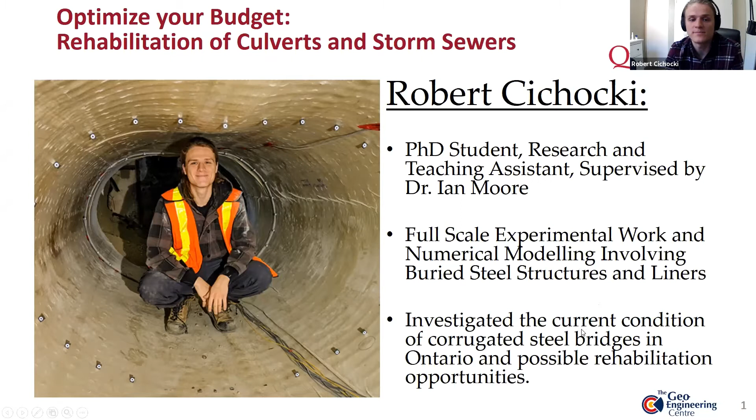What I found is that there's a lot to untangle from a lot of different resources. During my research, I reviewed resources from the MTOs, other departments of transportation, the Federal Highway Administration Program, National Cooperative Highway Research Program, different conference papers, journal articles, manufacturers' brochures, as well as other documents. For my investigation into these resources, I built a 3-part report that looked at what is the current condition of these structures, why are they in this condition, and what can we do about it?

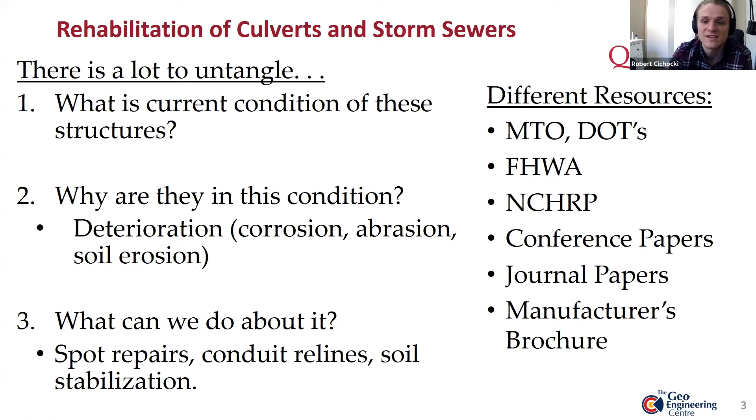So in this presentation, I'm going to briefly discuss the current condition of corrugated steel structures in Ontario, and the commonly experienced deterioration mechanisms such as corrosion, abrasion, and soil erosion, and what we can do about it. Some spot repair methods, as well as conduit relines and soil stabilization, which for most of these things are actually also discussed in the research paper that we published on this topic.

Okay, taking a look at the condition of these structures. Every bridge structure in Ontario that's managed by the MTO has to be inspected on a biennial basis. Each bridge is inspected following primarily visual element by element inspection. Out of all the bridges that the MTO oversees, there's about 280 of them that are made from corrugated steel materials. For corrugated steel structures, the condition of the steel conduit is judged by the amount of corrosion, local and global deformation, as well as bolt cracking.

So again, we're looking at a rating scale that goes from excellent condition, where there's no observed material defects, good condition, fair condition, and poor condition, where we're evaluating how much global and local deformation the corrugated steel pipe has, as well as how severe the bolt cracks are and how severe the corrosion is. A condition rating is then assigned to the element based on what's found.

Based on the condition of the elements at the time of inspection, the structure is given some sort of remaining value. That remaining value of the structure is compared to what the original value of the structure would have been if it was in excellent condition. Then we multiply that proportion by 100 to get our bridge condition index.

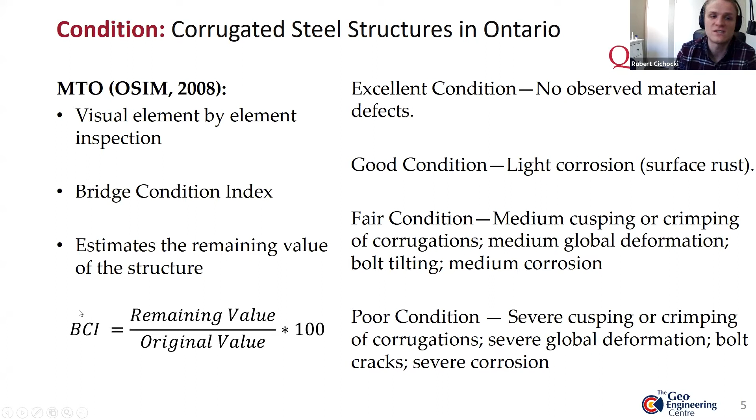Generally, the bridge condition index is used to prioritize the rehabilitation of bridge structures. For bridge structures that score over 70, there's no rehabilitation plan, and you can see that there's a majority proportion of bridges in this area. Between 60 to 70, rehabilitation should be undertaken within the next 5 years. And under 60, there should be some sort of immediate rehabilitation plan.

So what we're looking at in this chart is cumulative population distribution curves, and each curve represents a different type of bridge material. For each bridge material, that curve shows what proportion of that bridge's material has at most a certain BCI value. We're looking at the bridge condition index on the x-axis and the proportion of bridges on the vertical axis. Taking a look at the dark red line, which represents corrugated steel, we can compare the condition of corrugated steel to other bridge populations.

Looking at corrugated steel structures, we see that it has the highest proportion of bridges that are going to require some sort of immediate attention, as well as the highest proportion of bridges that's going to require rehabilitation within the next 5 years. So this had me wondering, why is that really the case? Why do we see so many corrugated steel structures that have these high proportions of structures that are going to need some sort of rehabilitation?

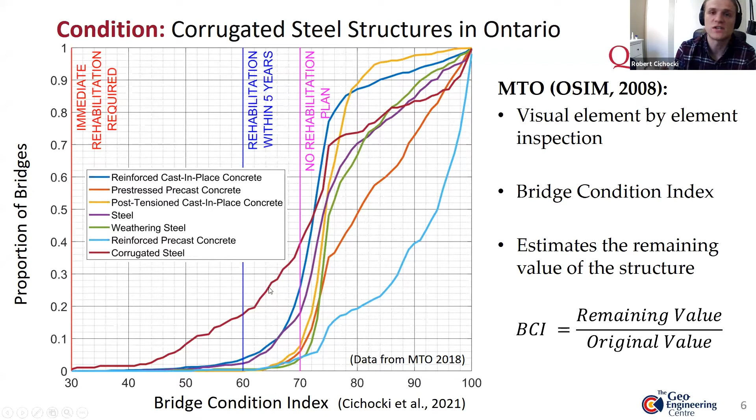The next thing I found when looking at the statistics from the MTO was that corrugated steel structures are one of the least rehabilitated structures they manage. Here we look at the proportion of bridges that were rehabilitated across the age of the bridge, with the bottom axis showing the year bridges were built and the proportion rehabilitated for that age group. For corrugated steel, almost across all ages these structures have the smallest population of rehabilitated structures. Cumulatively, only 37% of corrugated steel structures have been rehabilitated, while 48 to 88% of other bridge structures have had some rehabilitation performed.

Which brings up the next thing I found: historically there haven't been many comprehensive resources providing guidance on how to rehabilitate these structures and what the performance of these rehabilitations is, which explains why we find ourselves in the position we are today. Although as of 2019, the MTO has published their own trenchless design guideline on their webpage, which also provides information on many of the technologies I'll be discussing today.

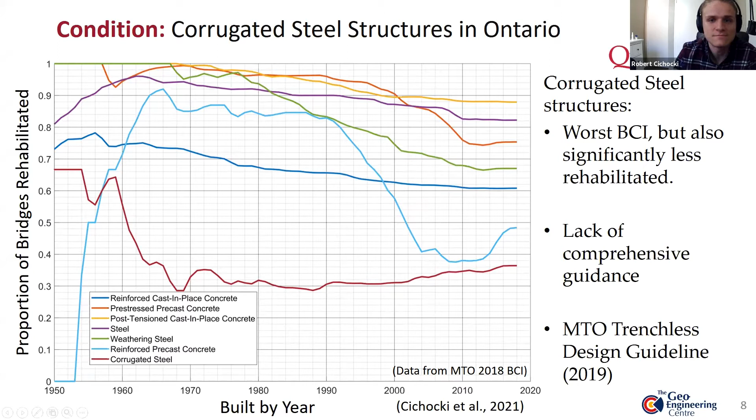So all structures deteriorate over time, and it's good practice to understand how and why. What's the problem? Why is it happening? What area is affected? And what are the signs of distress and structural concerns?

For corrugated steel structures, we identified a number of root problems which consist of corrosion, abrasion, construction issues, differential settlement, and soil erosion. Today I'll mostly be discussing deterioration and rehabilitation revolving around corrosion and abrasion, as well as soil erosion.

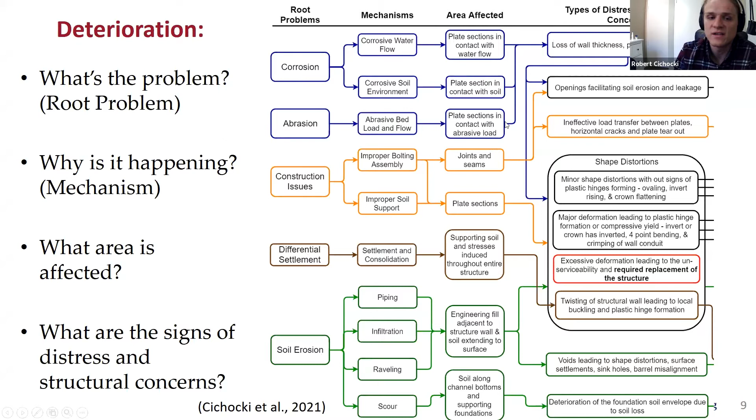For each root problem, there's a mechanism that causes it, as well as an area that is affected and a resulting structural concern.

As corrosion is a naturally occurring process, we should all be pretty familiar with it. For corrosion to occur, four main components are involved. First, there's the reduction of the metal by the release of an iron atom at an anodic site. So we can see our metal being reduced as an iron atom loses its electron and is released into our solution at the anodic site.

Next, we need a polar solvent for the iron atom to dissolve into where the reaction occurs. Then we need the deposition of rust at a cathodic site, where the iron atom reacts with the oxygen molecule and iron oxide is deposited on the surface of the material. We also need a conductor allowing the flow of electrons between the anodic and cathodic sites, so when the iron is deposited as iron oxide on the surface, it can regain its electron. The metal acts as a conductor between the two sites and allows the iron to regain its electron.

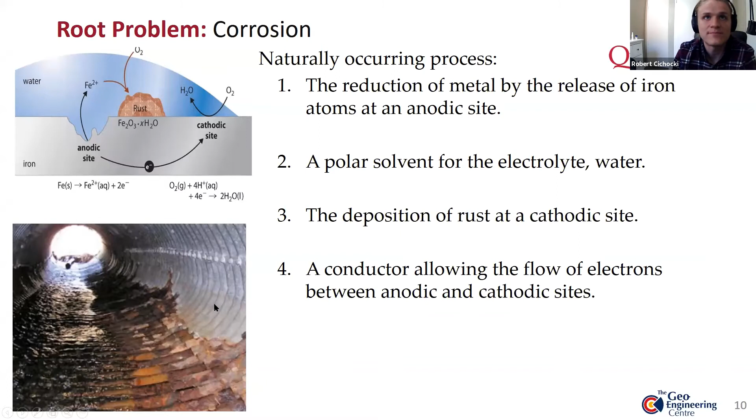Corrosion is a pretty extensively studied phenomenon, as it negatively affects billions of dollars of infrastructure. Generally, we're okay with some amount of corrosion occurring, so long as it's properly accounted for in our design life.

It's well understood that the rate of corrosion varies with site characteristics, such as water acidity - what is the pH level - water hardness - how much calcium carbonate is dissolved in the water - resistivity of the water, and the presence of chlorides.

Often chlorides are present in the water or electrolyte through de-icing salts or from the presence of seawater. Essentially, chlorides contribute soluble ions to the electrolyte, so water is able to conduct electricity more freely, which decreases its resistivity and increases the rate of corrosion.

The Corrugated Steel Pipe Institute keeps up to date with how to monitor these site characteristics and outlines how to pick materials that should be adequate for the design service life based on them.

These charts are from the performance guideline for corrugated steel culverts, published in the technical bulletin by CSPI. As we can see, polymer coated laminated products have the best resistance to corrosion across all site characteristics. This is mainly because the polymer acts as a barrier between the iron, which is part of the structure material, and the corrosive environment, such as the polar solvent and oxygen - it completely stops the reaction from being able to happen.

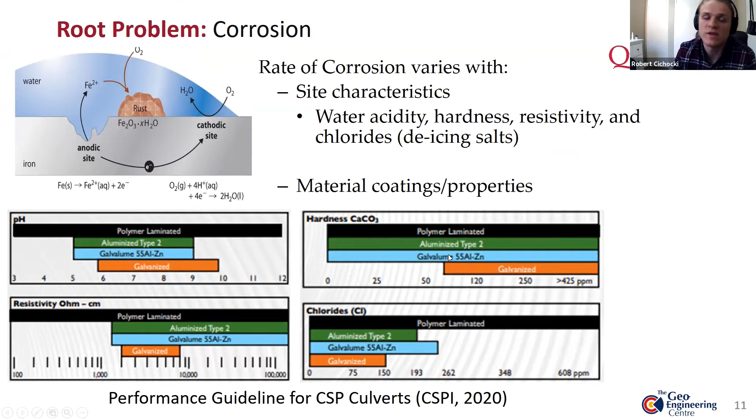Abrasion is an erosive process which reduces our structure's wall thickness as water and sediments flow within and through the conduit. Generally, the sediments carried by the flow of water are called bed load.

For abrasion levels 1 and 2, generally we see low flow rates under 2.4 meters per second, with bed load consisting of silty materials, clays, sand, or gravel. Once we jump up to abrasion levels 3 and 4, we're looking at flow rates up to 3.7 meters per second with moderate bed load volumes of angular sands, gravels, cobbles, and rocks. At higher levels, we're dealing with fast flowing waters up to 6 meters per second that carry heavy bed loads of angular sands, gravel, and rock.

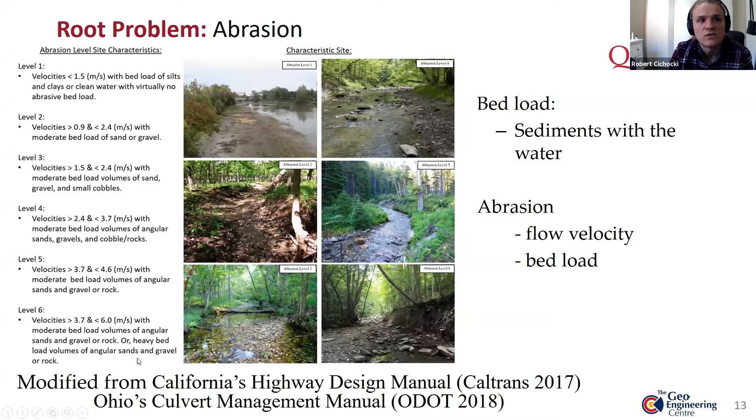The Corrugated Steel Pipe Institute also has its own characteristics for abrasion levels and recommends different materials for them, again based on what type of material is being carried by the water and the anticipated flow rate. Polymer laminated materials are one of the most abrasion resistant materials we have. If you're looking at really abrasive environments, you probably want to consider adding sacrificial pavements or building an open bottom structure.

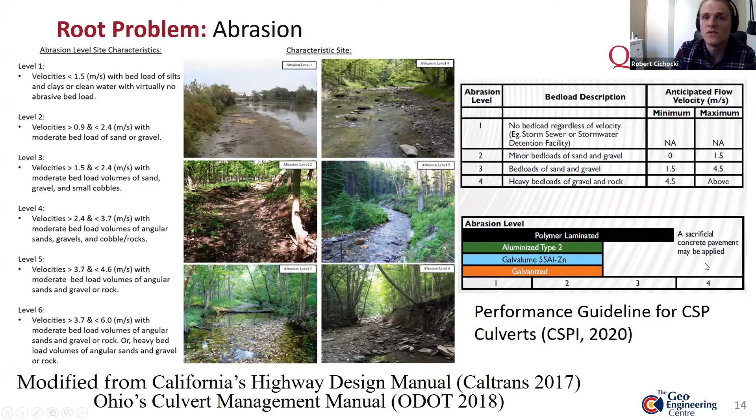Next, we have soil erosion. Generally, for piping, we're concerned with water that's flowing around the structure. For piping to occur, we need some sort of permeable material for the water to flow through, and water pressure to push it through. As water flows through the soil, the flow concentrates at paths of least resistance, which can occur on the outer boundary of the pipe.

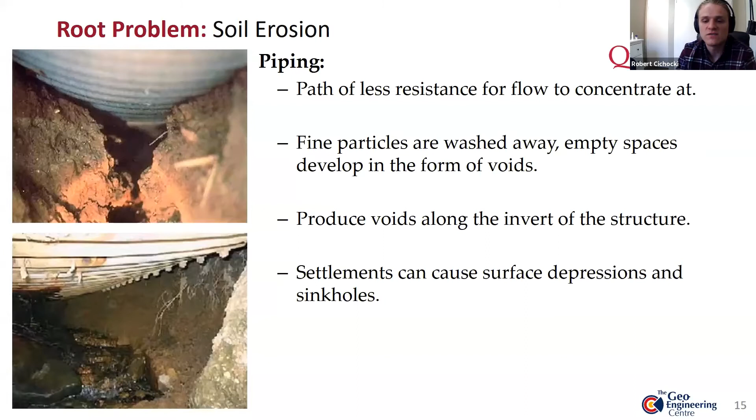In some cases, as seen in the first picture, this results in fine particles being washed away and leaving behind empty voids. In other cases, as seen in the second picture, this can progressively get very aggressive and leave large voids underneath the structure. This causes particularly large risk as the structure is losing its soil support. From this point on, we can probably expect large settlements to occur, as well as surface depressions, and potentially a sinkhole to follow. Also, if you have high enough water pressures for piping to occur, you could also be looking at issues with the hydraulic capacity of the structure, as well as issues with the head wall and inlet of the structure.

Another soil erosion process commonly observed is infiltration. In this case, we're concerned about water flowing from the embankment into the structure through some sort of unwanted leaks. Commonly observed infiltration points are joint openings, as well as perforated sections that can occur from corrosion and abrasion. Voids generally develop adjacent to the structure and can extend upwards to the surface. From this point on, we'd probably expect that our conduit can experience some sort of shape distortions, surface depressions, and potentially leave a sinkhole.

We've also studied, under simulated vehicle loads, the effect of erosion voids around different types of structures at a facility at Queens. Generally, what we saw is that when we have erosion voids around our structures, they amplify the section forces and moments, so they reduce the capacity of the structure.

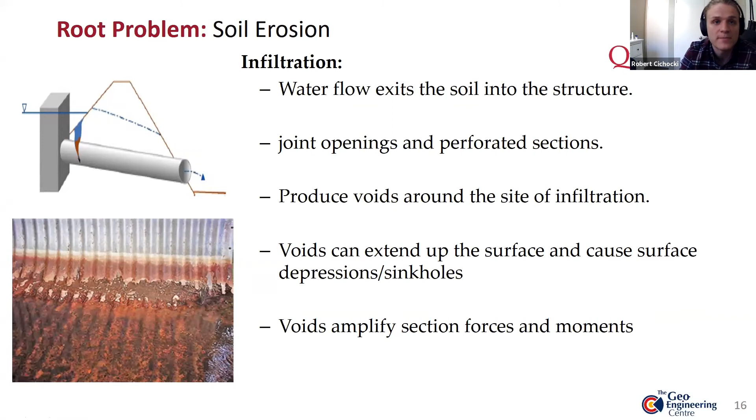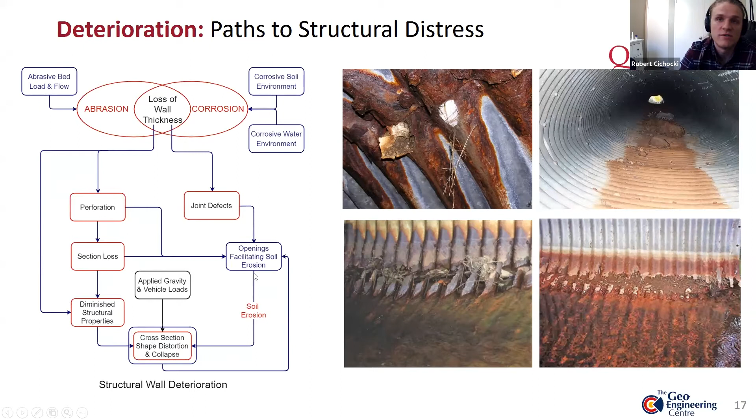Here's a chart summarizing what I learned about how abrasion and corrosion can cause structural distress and concerns. Generally, abrasion and corrosion will result in the loss of wall thickness, as well as perforations, and lead to diminished structural properties. When we apply our vehicle loads and gravity loads, we can probably expect some sort of cross-section shape distortions and potentially collapse. And section loss and perforation also leads to openings facilitating soil erosion, opening up an opportunity for another deterioration mechanism to occur.

Here we have another chart summarizing what I learned about soil erosion and the structural distress and concern that it causes. Once we have a means for soil erosion to occur, either piping or infiltration, voids can develop and diminish the structural support the soil has to offer. With our given gravity and vehicle loads, we can expect different barrel and soil movements to occur: barrel misalignments, cross-section and shape distortions, as well as surface settlements and sinkholes. Further, these types of distortions and movements can also cause separated joints, which also leads to more opportunities for soil erosion to occur.

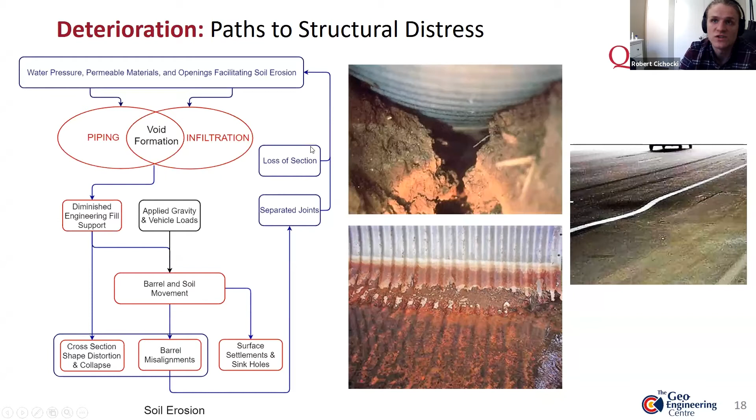When it comes to rehabilitation, there are a couple of newer publicly available published resources which discuss the variety of technologies available. First, we have a document from the National Cooperative Highway Research Program called Culvert Rehabilitation to Maximize Service Life while Minimizing Direct Costs and Traffic Disruptions. This document discusses a variety of methods and applications, gives information about what these methods involve as well as their limitations and advantages, and also tries to provide guidance on choosing an appropriate rehabilitation method with the use of flowcharts.

Second, we have a recently published document from the MTO, the MTO Trenchless Design Guideline. This document tries to provide the best, honest, and up-to-date guidance for a variety of rehabilitation methods. With it, the MTO tries to come up with a standardized approach for design which considers the most up-to-date scientific findings as well as industry standards. This is a great resource once you have a rehabilitation technique in mind, because it provides information about all the different aspects of design, from environmental, hydraulic, as well as structural considerations.

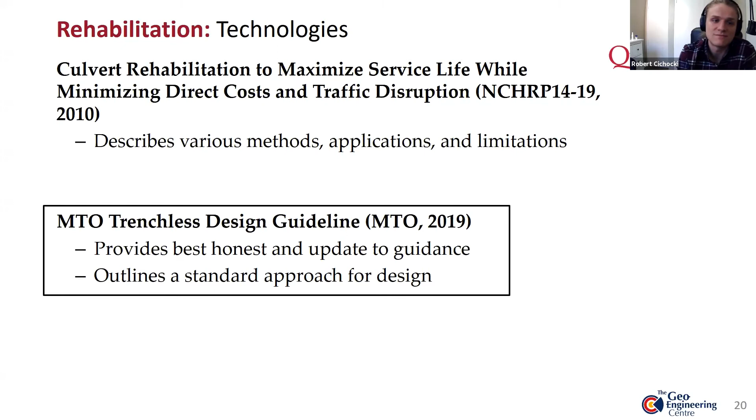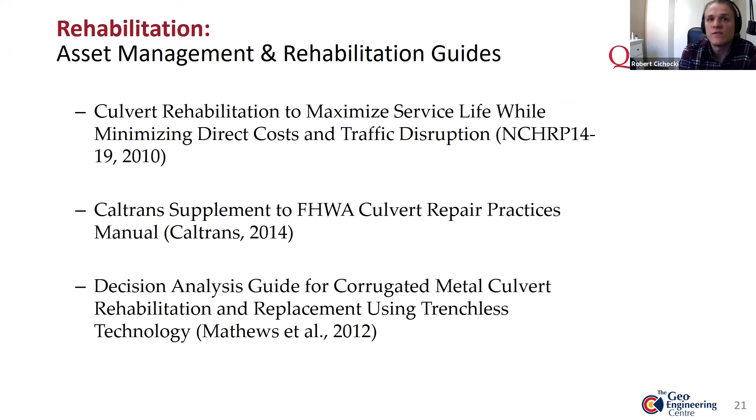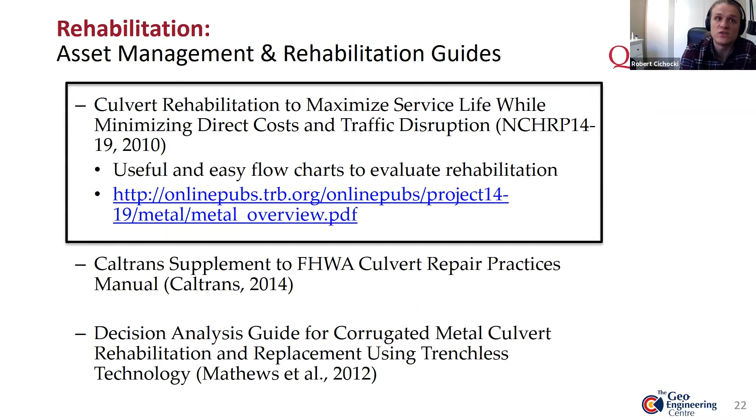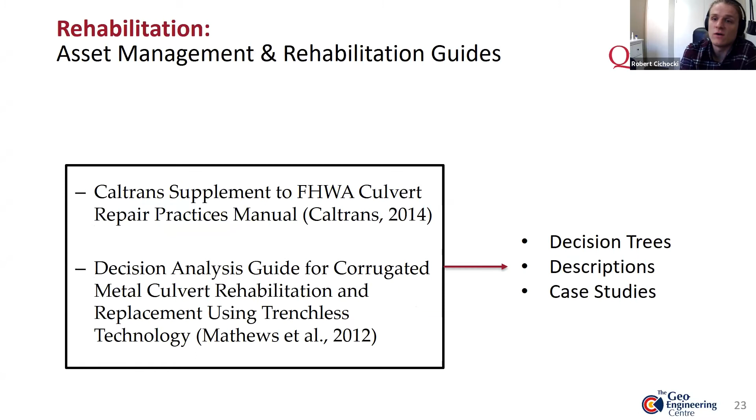But picking the right technology to rehabilitate can also be tricky. Some common resources I've reviewed that try to tackle this problem are the Culvert Rehabilitation Manual from that NCHRP project, the Caltrans supplement to the Culvert Repair Practices Manual, as well as the Decision Analysis Guide for Corrugated Metal Culvert Rehabilitation and Replacement using Trenchless Technology. The NCHRP project offers some pretty easy to follow flowcharts to help evaluate which rehabilitation technology could be used in your situation. As for the other resources, they offer concise decision trees for evaluating different options, descriptions of the technologies, as well as follow-up case studies for each type of technology being applied.

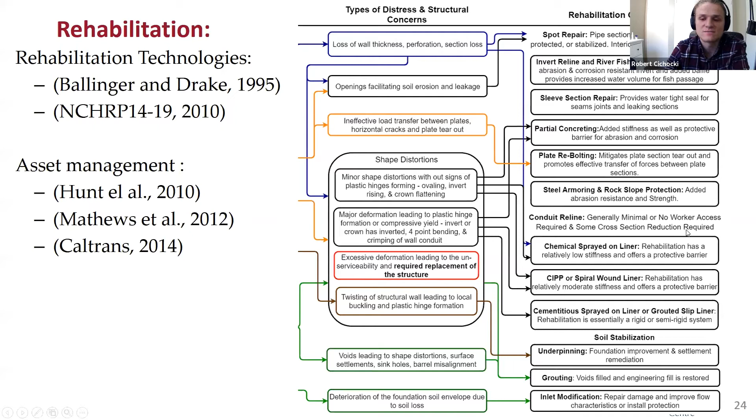Okay, so now for the final part of this presentation, I'm going to take a closer look at some of these rehabilitation technologies before handing it back to Ray. Specifically, we're going to look at some spot repair methods, as well as some conduit reline techniques.

Partial concreting is a popular rehabilitation method for essentially repairing damages due to corrosion and abrasion. The method is commonly used by the Federal Highway Administration, Caltrans, Ohio State Department, as well as other departments of transportation. Both Caltrans and the Ohio State Department of Transportation have guidance on non-structural and structural type rehabilitations that aim to restore the structural capacity of the invert after it's been corroded out.

Generally, we see rehabilitations covering 90 to 180 degrees of the invert, using either conventional or high strength concrete. As you can see in the picture, we have L-angles welded across the spring line of the structure, as well as wire mesh used for light reinforcement. The wire mesh is spot welded to the structure, with about 4-inch spacing circumferentially and about every 30 inches down the length of the pipe. Before grouting or applying the concrete invert, they also grout any voids present in the structure. After the voids are filled, then the cement mortar is applied.

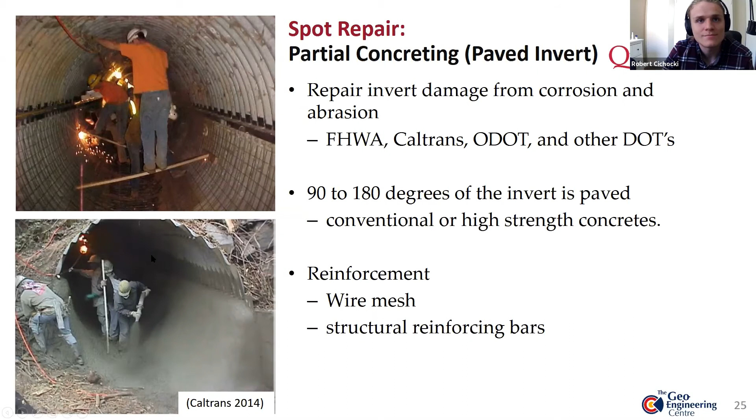Paved invert is one of the rehabilitation technologies that has been previously studied at our lab at Queen's University. A previous master's student, Jacob Tetrault, investigated the performance of a deteriorated culvert before and after rehabilitation. The culvert was buried at our test facility at a cover of 0.5 meters and tested under Ontario truckloads. While buried in our test facility, the culvert was rehabilitated with a non-structural method specified by the Ohio State Department of Transportation.

This rehabilitation technique generally involved having L angles welded to the bottom of the haunches of the structure, as well as wire mesh sitting on rebar chairs. After the reinforcement was put into place, the invert was cast with a Portland cement concrete that had a 7-day compressive strength of 30 MPa.

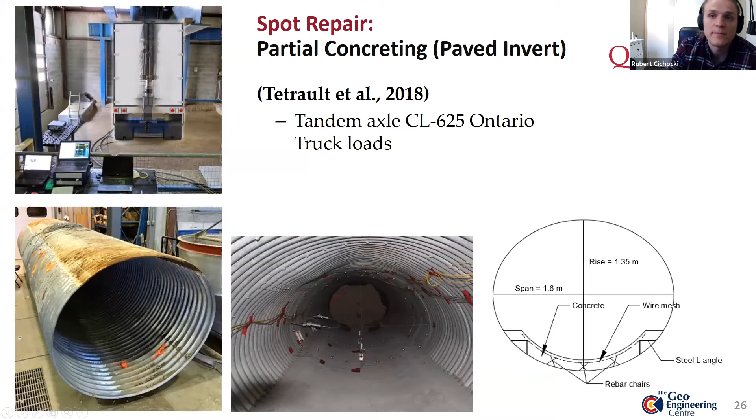While being tested under these service loads, we saw that this installation actually increased significantly the stiffness of the system. So essentially, we saw a more stiff system after the rehabilitation. Although the concrete experienced bending, it didn't crack under this loading configuration. Ultimately, the ultimate limit state in this configuration was that the corrugated steel pipe was bending.

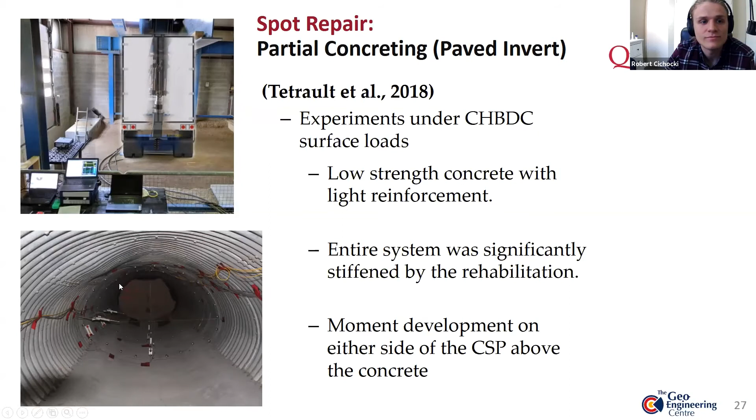For our next spot repair method, we have partial relining. This method is similar to the paved invert method, where we're trying to restore the structural and hydraulic integrity below the spring lines. The invert liner material is selected while also considering abrasion and site characteristics, and generally the new liner portion of the structure is assembled outside of the structure and then brought into the structure.

Once inside the structure, the lower portion is bolted onto the existing section where connections have previously been welded onto the structure. For this particular system, the connections are actually designed to transfer normal and flexural forces between the new and old portions of the structure. Once everything is assembled, the concrete is then poured between the new and the old structure, and generally props are installed to compensate for any lifting forces due to buoyancy.

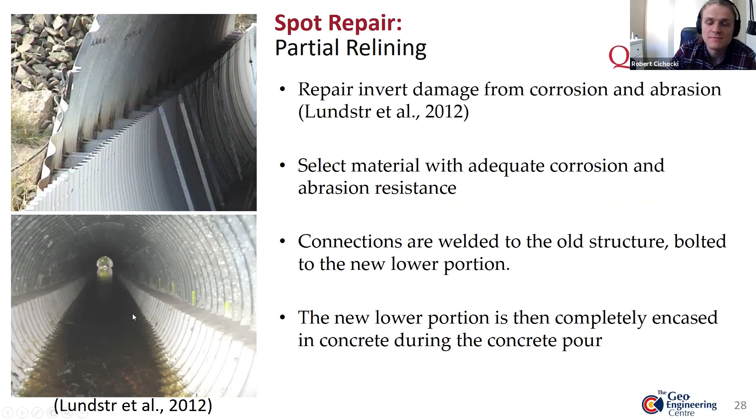When passage for aquatic species also becomes a critical concern, polymer-coated river fish baffle may also be applied to reline the invert of the structure. The polymer coating is laminated to the plate, which adds protection against corrosion. These plates are installed transverse along the length of the pipe, so that we can build up the volume of water between the two plates. They also have cuts installed in them, which allow for water to flow through as well as fish to pass.

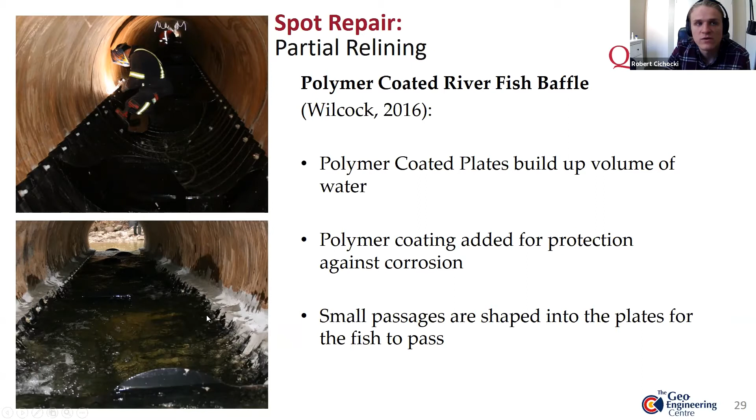Next we have conduit reline techniques. Cured in place pipelining is a method in which a flexible tube material is saturated with a thermosetting resin. This saturated tube of material is then expanded into a deteriorated structure using air pressure. Generally, there are two types of CIPP liners, or cured in place pipe liners, being installed. We have the conventional felt liner, which is typically just heat cured, and the second liner we have is the UV cured liner, which is a reinforced liner.

The UV cured liner system uses reinforcing glass fiber polymers to achieve much higher stiffness properties than we could ever achieve with the conventional liner system. If we're looking at the fiberglass liner and its elastic modulus, it has about an order of magnitude higher stiffness than the felt liner, but still about an order of magnitude less than corrugated steel itself. Typically, these liners are installed in diameters from 100 millimeters to 1800 millimeters.

So at Queen's, as part of my research project, I was actually fortunate enough to be able to witness these two types of liners being installed, as well as conduct an experimental investigation on both of them.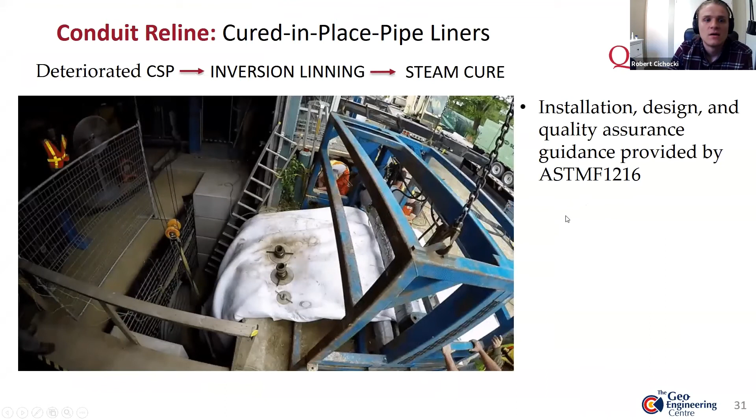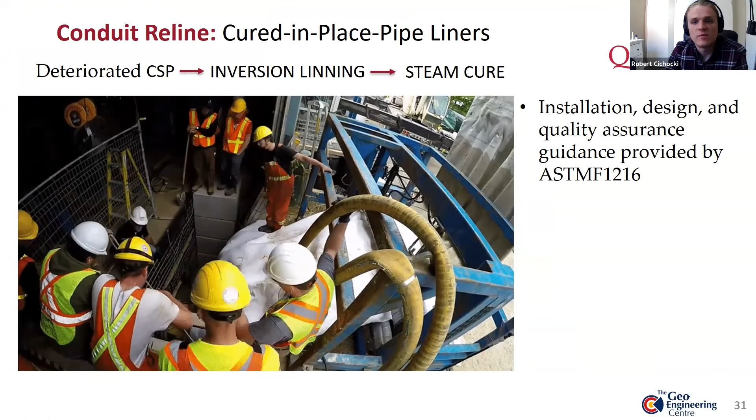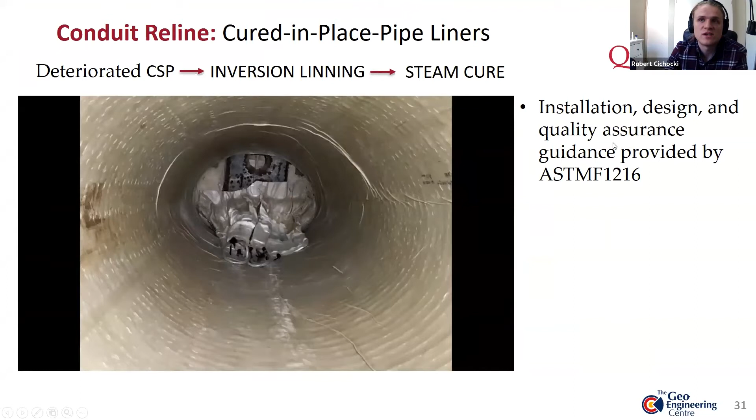Here I have a short video of the liner being installed using the inversion method at our testing facility. As you saw in the video, the liner is made up of felt material, which is also saturated with a thermoset resin. Once the slot liner is put into the installation rig, it's blown up using air pressure. After it's inverted, the steam is turned on, and then the resin is cured solid. Guidance for these installations, design methods, and quality assurance for this project is provided by ASTM F1216.

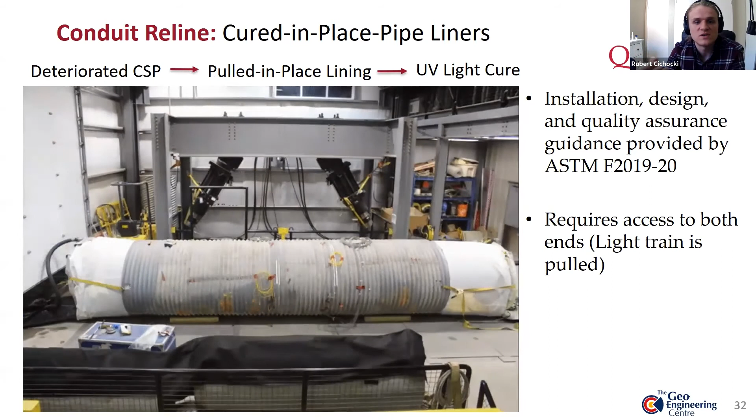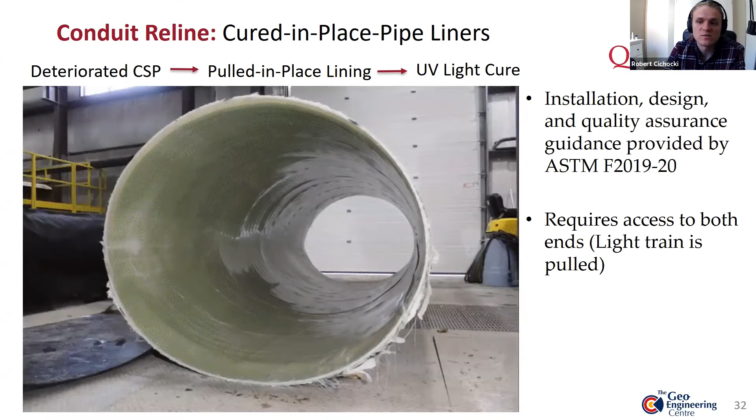Next, we can see a liner being installed using the pulled in place method and being cured with UV light. With this installation, the liner is pulled into place while being dragged over a sliding sheet. Once it's in place, it's expanded with air pressure, and the UV light train is then inserted and the liner is cured. Guidance for the installation, design, and quality assurance for GFRP liners is provided by ASTM F2019.

That's a great question. I'm not 100% sure about the environmental considerations for grouting, but I know that the MTO trenchless design guidelines talk about grout in place liners and environmental concerns. That'd be my first place to look, to see if there are environmentally friendly grout types, as well as anything locally available that meets environmental considerations.

And another question was regarding the relining - does it affect the capacity, or how does it affect the capacity? Do you need to redesign or consider that?

For an entire conduit reline system, some of the research I've been doing right now, we're studying how this, especially cured in place pipeliners, affect the capacity of these structures. One thing we found is that it does add additional stiffness to the system, but it doesn't really follow the design guide - the behavior of the structure didn't really follow the guidelines we saw from the ASTM F1216 standard.

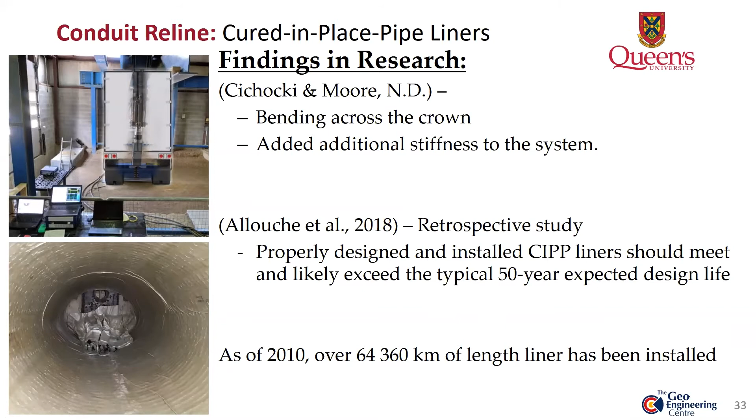There was one retrospective study that looked at CIPP liners where they went into in-situ investigations. From their research, what they found is typically these liners are probably going to exceed their 50-year expected design life. Another cool fact I found is that as of 2010, there's 64,000 kilometers of length of liner that have been installed.

For structural design, typically we're looking at hydrostatic pressures acting on the outside of the liner, and historically it's been designed using the enhancement factor method. For surface loading, the liner also has to be designed to withstand direct bury using a fiberglass pipe design equation.

This fiberglass pipe design equation is actually pretty dated and considers a buckling failure mechanism, which we didn't really see in our research at all to govern the behavior of the pipe.

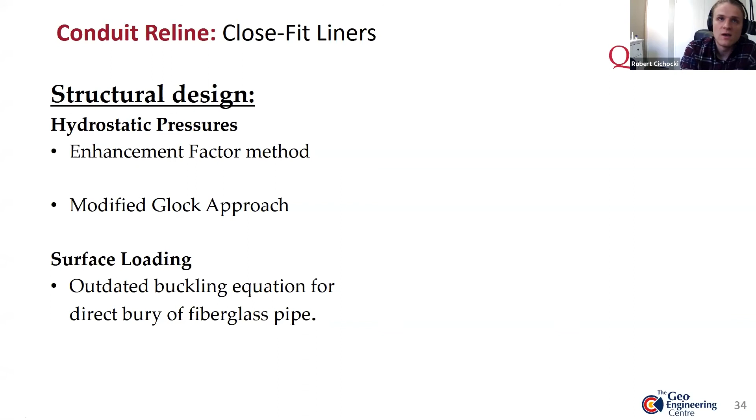Previously, a lot more research has been performed over the last couple decades where more comprehensive theories for hydrostatic pressures have been developed, so we're able to design liners in more complex configurations, such as the pipe arch culvert I'm studying right now. Although one issue we're still trying to tackle is how to design close fit liners against surface loads.

Currently there's a couple ongoing projects to update the guidelines for these liners. First, we have the ASCE project, which will come up with guidance for close fit lining design. Then there's also an NCHRP project being undertaken to come up with a load and resistance factor design for CIPP liners. Hopefully this study will give more relevant guidance for designing against surface loads.

So I hope that wraps up answering the question we had previously.

Yes, and there are some more questions that came in. So do felt liners reestablish any loss of ring compression strength to the host pipe, which may have been lost?

Yeah, so that's a good question. From what I've seen in research, if we compare the structural properties, like the cross-sectional area and thrust stiffness, the EA of the corrugated steel pipe versus the felt liner - if you multiply these two numbers together, you're going to probably get a number that's about 5 times less than what the stiffness of the corrugated steel pipe would be.

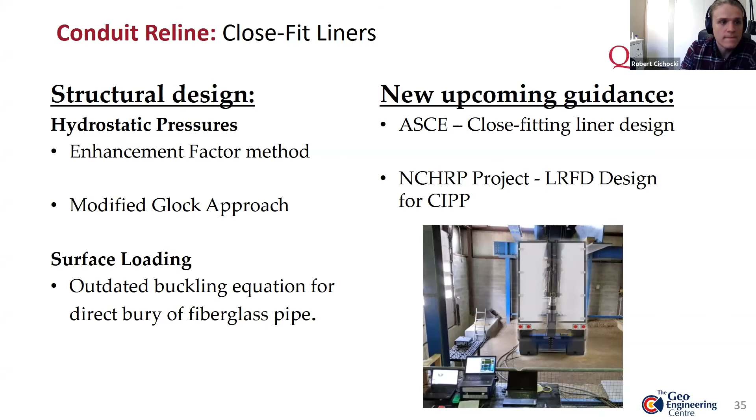These methods can be applied in structures from 0.3 to 3 meters in diameter, as well as much larger structures that exceed 3 meters diameter. One of the things that's neat about this structure is the versatility of the materials that can be used. We can use thermoplastic pipes, reinforced concrete, centrifugally cast FRP, as well as corrugated steel materials.

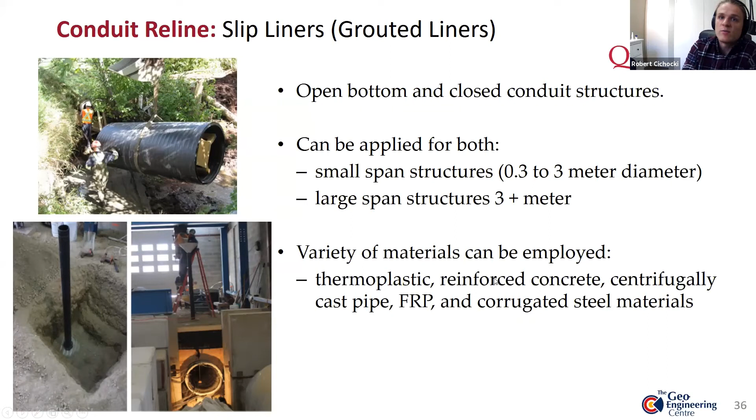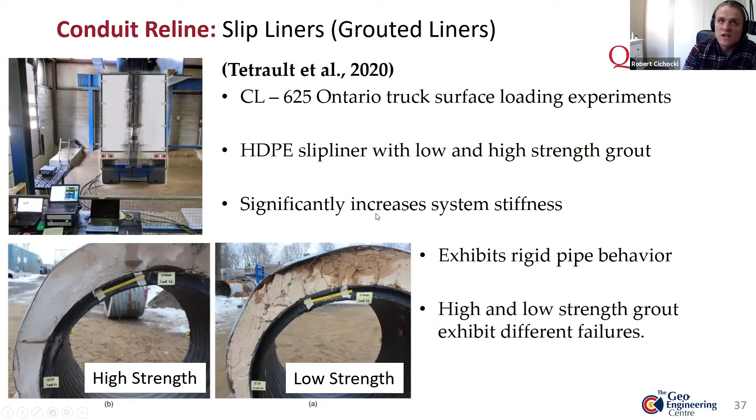I'm not going to get into this slide too much more since we're running short on time, but this is one of the technologies we did study in our lab, and you can follow up looking more at the results of what we found. Essentially, it does provide great additional stiffness to the system. We also were curious as to what the effects of grout choice were when studying the grout-in-place liner, and we found two significantly varying behaviors. If you're interested, the MTO Trenchless Design Guide also talks about these systems, and we do have published research which investigates this behavior.

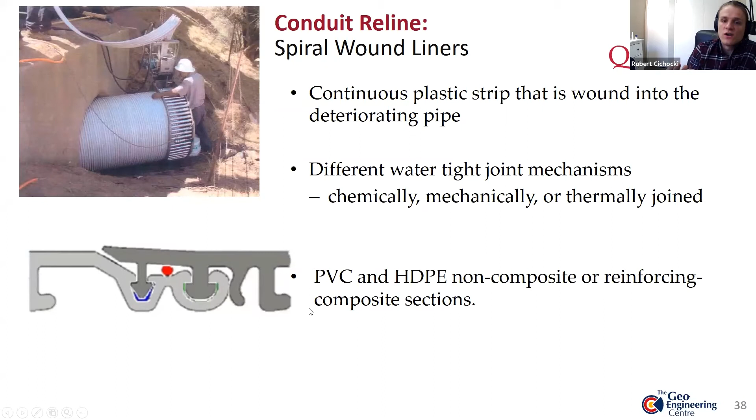Spiral wound lining is another technology that is possible to use. Essentially, spiral wound liners consist of winding a continuous strip into a liner and inserting it directly into the deteriorated pipe. As the liner is wound into the pipe using a specialized machine, the edges interlock to form a continuous watertight liner. These edges are manufactured with male as well as female joint edges that can either be chemically, mechanically, or thermally joined. Different PVC and high density polyethylene composite or non-composite strips can be used to achieve different liner stiffnesses.

When it comes to installation, generally there are two types: this loose fit where you have a fixed diameter, and this kind of becomes a grouted slip liner because afterwards you have to grout the space between the spiral wound liner and the existing pipe. In the second one, we have this close fit liner where we install it at one diameter and then it expands to fit the other conduit after it's been pushed in and installed through the pipe.

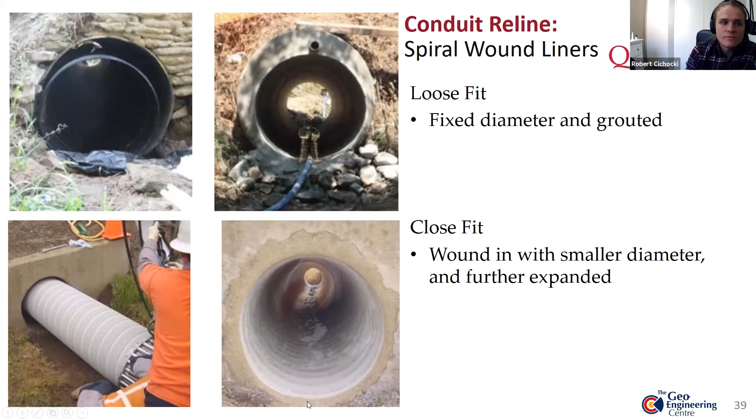One more technology we looked at, especially studied in our research facility and published literature about, is sprayed-on cementitious liners. This method creates a concrete liner within the existing pipe. Typically the lining is pumped in at high velocities while a rotating head centrifugally casts the mortar onto the pipe.

Following the similar set of experiments I previously talked about, looking at Ontario truckloads at shallow culverts, we saw that this rehabilitation method did significantly stiffen the system. We also saw that it behaves like either a rigid or semi-rigid pipe, and we were able to propose a variety of design equations for this method using either composite or non-composite action.

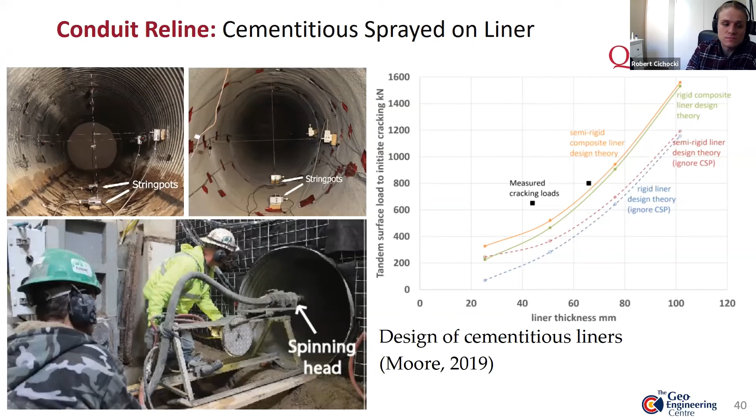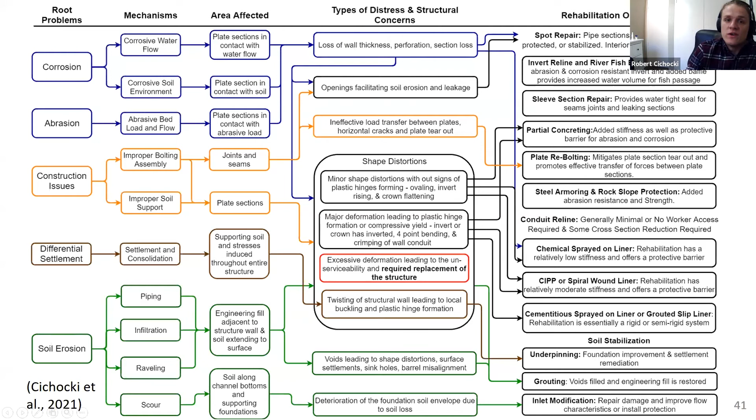So what we looked at today is the current deterioration mechanisms of corrugated steel pipe, as well as typical signs of distress and rehabilitation opportunities. I built a chart based on my learning, looking at what the root problem of these structures is, how it's occurring, why I'm concerned, and what the opportunities are for fixing it.

Now I'm going to hand it back to Ray, where he can briefly talk about a case study, or I can also take this opportunity to answer a couple of questions.

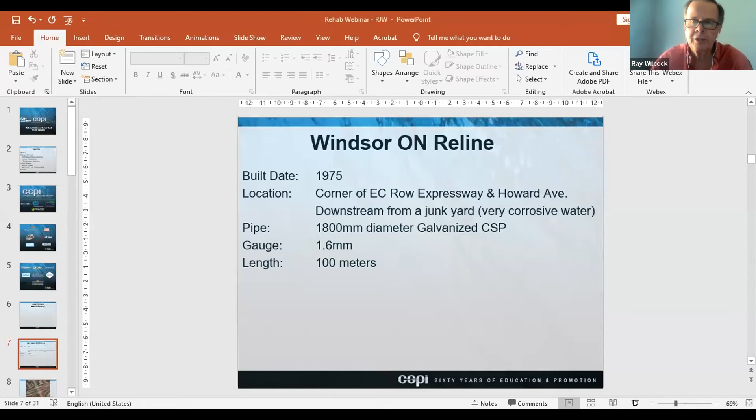Thank you, Amen. Can you hear me okay? Yep, okay.

First one I wanted to talk about is just a couple of relines I was involved in back in the early 2000s. The first one is a Windsor reline, Ontario. The built date was 1975, at the location, the corner of EC Row Expressway and Howard Avenue. It was basically downstream from a junkyard, so very, very corrosive water was passing through that particular storm sewer.

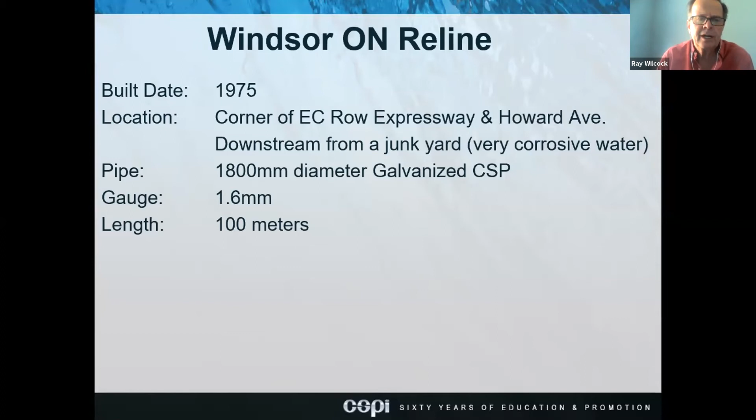The pipe was an 1800 millimeter diameter galvanized CSP. The gauge was 1.6 millimeters and the length was about 100 meters. And here's an overshot picture of where that storm sewer was.

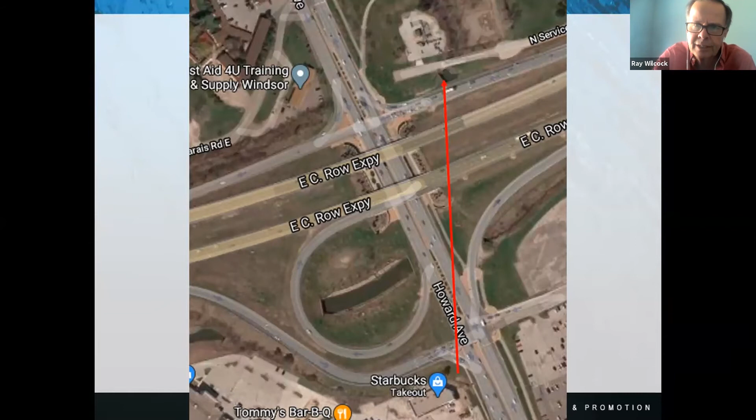It was more or less underneath the EC Row Expressway Highway, with Howard Avenue going underneath. It started just where that Starbucks takeout is, and went all the way out to the outlet you can see across there.

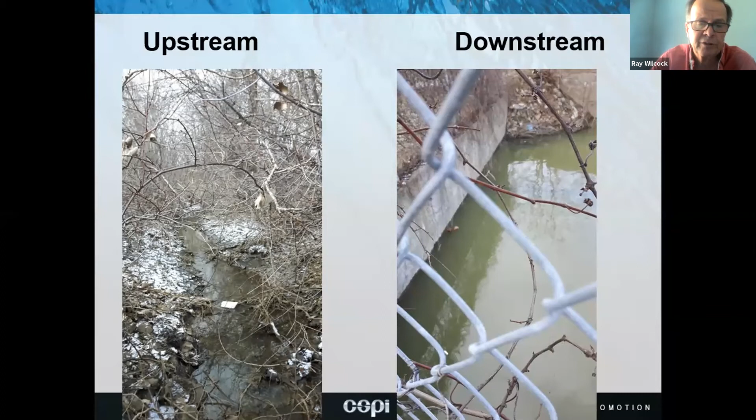Here's a picture of the upstream. It's hard to tell, but that was very corrosive water - you're probably talking about 500 parts per million with regards to chloride, so not very pleasant. And there is the downstream, the outlet.

The reline date we were called in for was about 2005, so the pipe was about 30 years old. What we did was reline it with a 1,500 millimeter diameter polymer laminated spiral rib pipe. Spiral rib pipe has a Manning's N of 0.012, so you're talking about a smooth wall pipe ribbed on the outside.

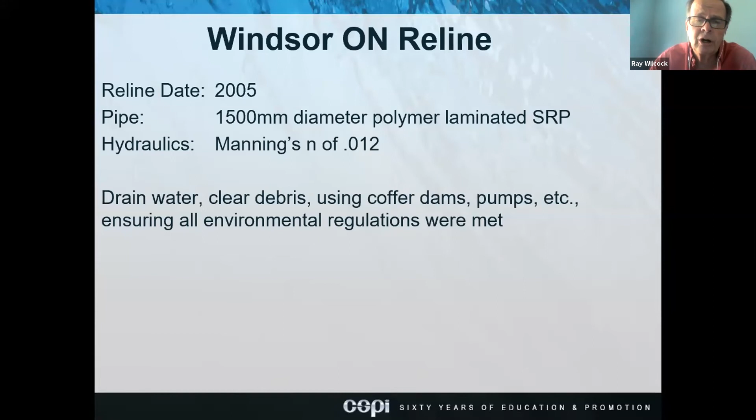The things we had to do were drain the water, clear the debris, use cofferdams and pumps, and ensure all environmental regulations were met. Here's a schematic of a small diameter reline showing the coupling, sliding, and blocking details, but I'm going to move forward here and keep going.

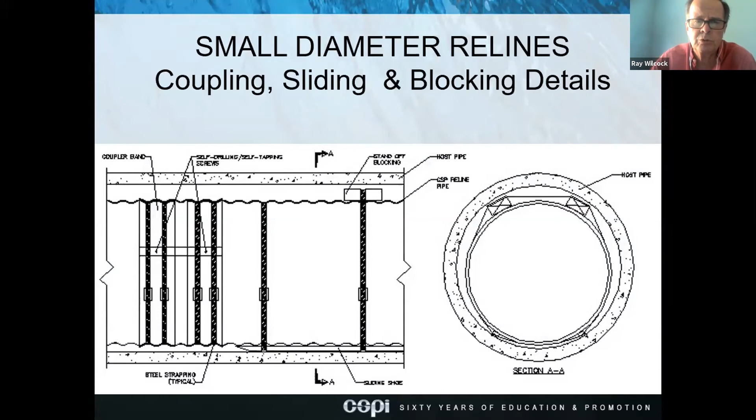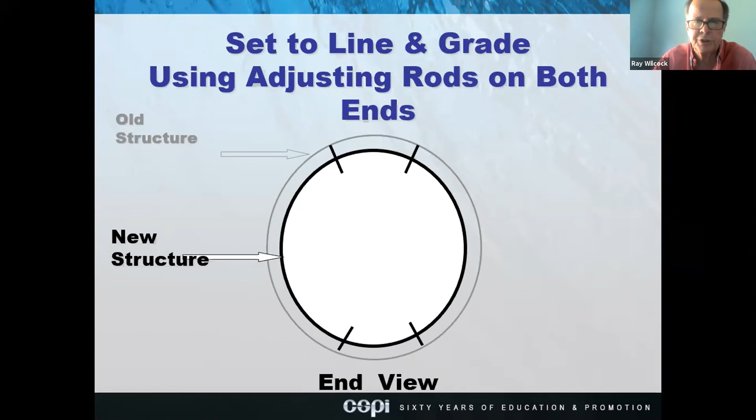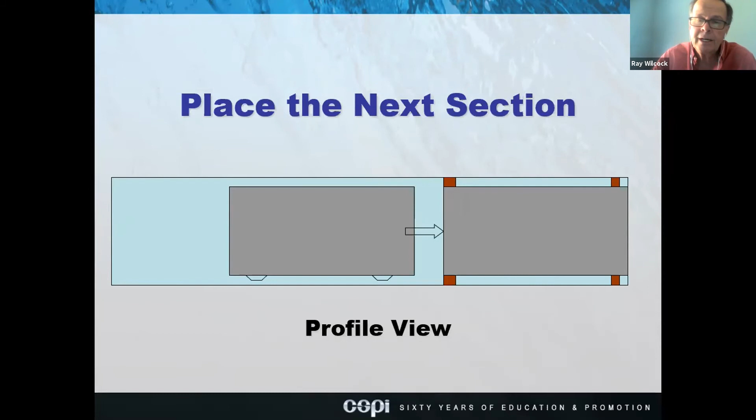So you insert the first section down through the pipe, set it to line and grade using adjusting rods on both ends - you can see the new structure inside the old structure in an end view. You block the first section from the top and bottom, place the next section up against the first, and block the tail end of that second section.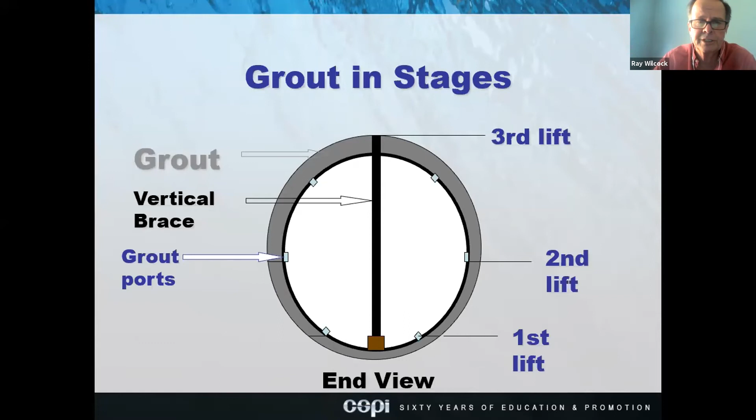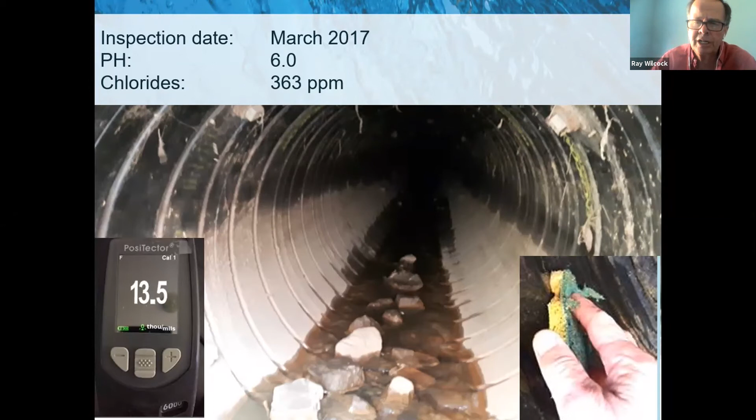And I checked it with my positector down around the invert just to see what it was. It came up about 13.5 mil, which for the coating of a polymer laminated pipe is anywhere between a minimum of 10 up to 13, 14. So that pipe was in excellent shape, but you can see some of the stuff lying in the bottom, the rocks that could cause some abrasion, and also the very corrosive water.

The last one that I wanted to show was the 401, 410, and 403. This was an Ontario reline. The built date originally of this particular pipe was 1974. The location, as I mentioned, was the intersection of those three major highways. At the time, there was an average of 320,000 vehicles per day going over that particular structure. The existing pipe was a 3050 millimeter reinforced concrete pipe storm sewer, about 200 meters in length. The culprit was the road salt from up above. The owner was MTO, the consultant was Morrison Hershfield, and the contractor was Underground Services.

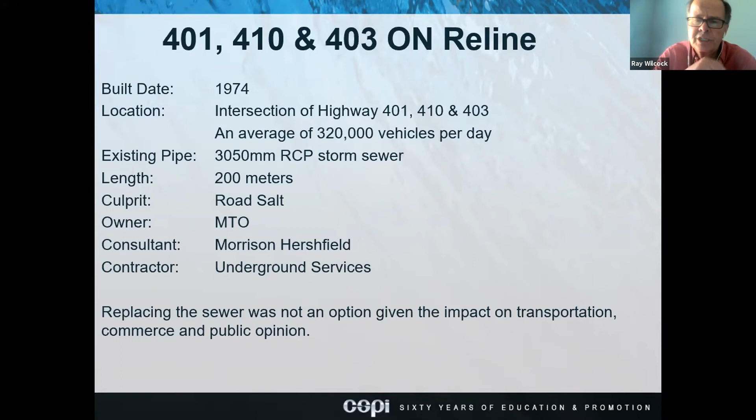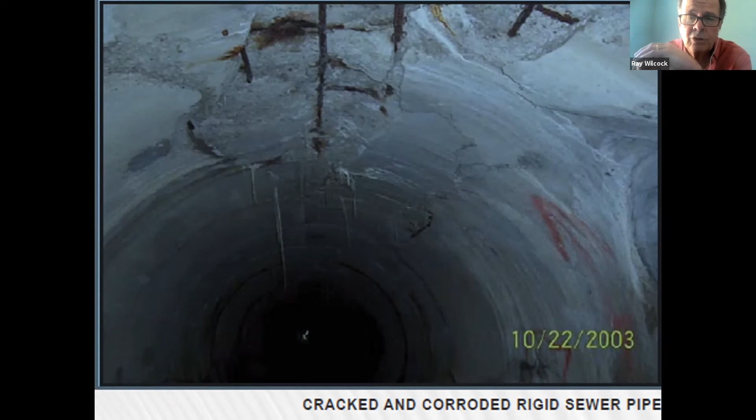Here's a picture back in 2003 of the concrete storm sewer. The salt had basically leached down from up above, perforated the concrete, got into the rebar, and started cracking and corroding and so forth. So we were called in.

We relined it in 2004. We used a 2850 millimeter galvanized corrugated steel pipe, with coal tar epoxy coating on the invert. It was a 125 by 25 profile with a 4.2 millimeter thickness. And we used composite drainage fabric installed outside the CSP at the joint connections.

The challenge was installation because there was a damaged section. The damaged section of the RCP was over 150 meters from the outlet, under the main travel portion of the 401. So we had to fabricate the CSP in 3.15 meter lengths to negotiate the bends in the existing sewer, and we used internal couplers as I showed before.

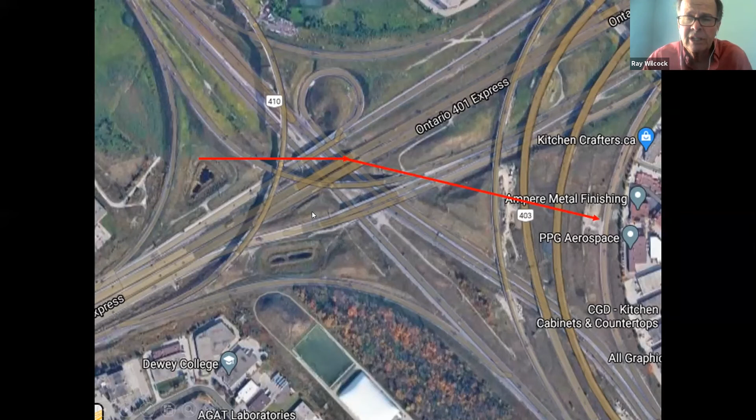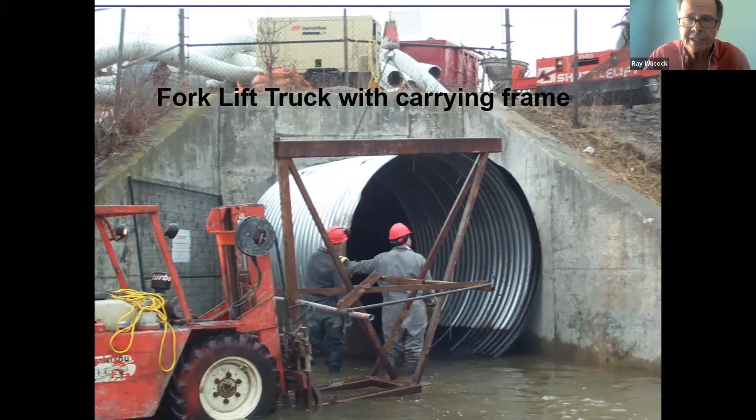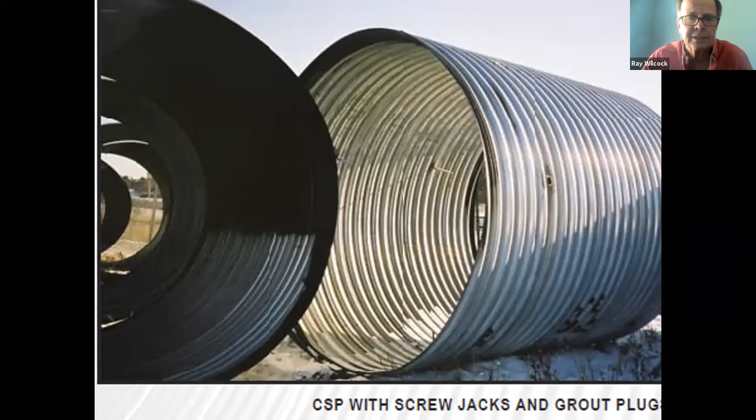There's a picture of a forklift truck with a carrying frame that was used to put those in place, and then they were pushed along until they butted up against each other, and then internal coupling systems were used, and grouting took place between the old and the new. There's another picture with CSP, with the screw jacks and grout plugs in play, 3.15 meters in length.

The whole job took about 3 months. It was planned over a 2-winter period, which was 6 months, but basically it was completed in 3 months. So it was a great savings to the MTO, and obviously they didn't have to call back the crews the following winter to finish it off.

Last slide that I wanted to show is that if you're ever looking for reline procedures with regards to small pipes or larger pipes, on our website at www.cspi.ca, we have procedures for small diameter and also large diameter, and linkages to Robert's research that he has done on behalf of us.